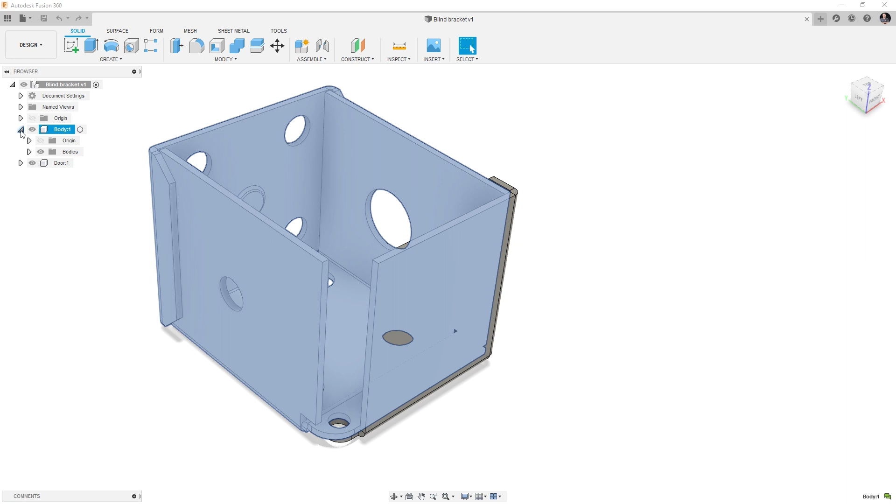This is actually an imported model, and you can see that for a couple of reasons. First, this is an imported STEP file. You will see there are two bodies here, and if we look at this first body, there are no sketches or anything in here, so it's what we call a dumb solid.

You will also see that I don't have my history turned on in here. Whenever you bring in a STEP file or another type of file into Fusion, it ends up in what we call direct editing mode.

But what's new in Fusion with sheet metal is that you can convert these dumb solids, a STEP file or a SolidWorks file or an Inventor file, into an actual sheet metal part right inside of Fusion. So if we go over to the sheet metal tab, there's an icon that says convert to sheet metal.

If I click on that, it will tell me that it's going to turn the history tree on so we can enable design history. You'll see that's now activated down at the bottom. Then all I have to do is select one of the faces of one of these bodies, so I'm selecting the side that belongs to this body.

Then it will call up your sheet metal rule set for whatever you had. If you're not familiar with sheet metal in Fusion, you can totally customize these sheet metal rule sets. I'm just going to pick the default I have in here, and you'll see that it's detected this is 1 millimeter thick, so it's a tiny little bracket. I'm going to hit OK to that.

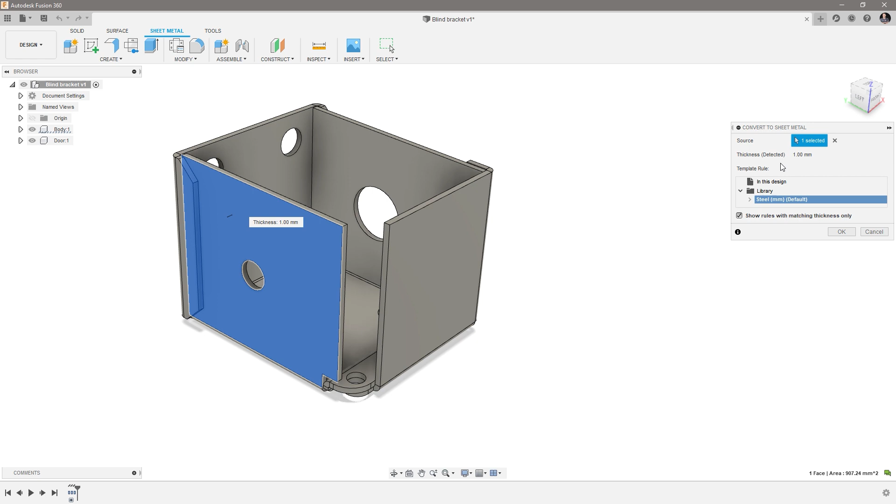When I do that, you'll see it converts it from a body into a sheet metal part. If I just expand it here, you'll now see that it has the rule in here and a sheet metal body.

We can do the same thing with the door piece here. The icons have changed a little bit because now it's a sheet metal part, it's ready to go, but the convert option is still sitting right here under create. Click on that, click on the door part, use the same template, and hit OK. Now we have two sheet metal parts.

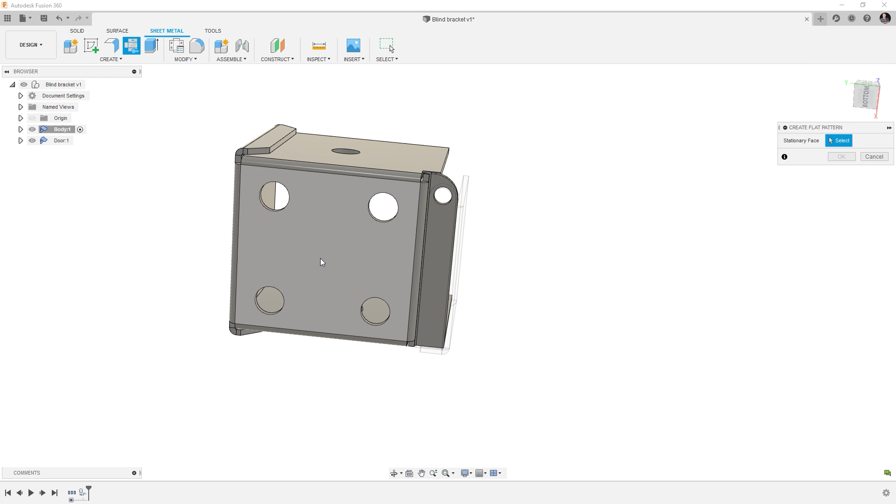That means we can just activate whichever one we want, and then go ahead and create a flat pattern from it. When you do that, you have to select the stationary face, select this bottom part of the bracket, hit OK, and then you'll see it becomes a flat pattern. You can now use that for cutting out with a water jet or a laser or whatever you want. We can do the same thing with the door.

We can go down and activate the door. And we can go over and say we want to do a flat pattern. Maybe we select that back face there, hit OK, and that will then become that flat pattern there.

Now, as you maybe have already noticed, we actually kind of have a sheet metal assembly. So just in case you didn't know, if you are already working with sheet metals, this is probably not new to you.

But we can actually use our standard assembly tools inside of something like this. So I can right-click on the main body, and I can ground it. So now that is kind of grounded and stuck in space.

And then one of my favorite assembly tools is the as-built joint, because this door is sitting where I kind of want it, I can just go ahead and click the two components, and then I can place, I have a revolute here, I can place that wherever I think I want it. Let me just zoom in, let's click it right there, and then we have a revolute joint placed, and now this is working as an assembly.

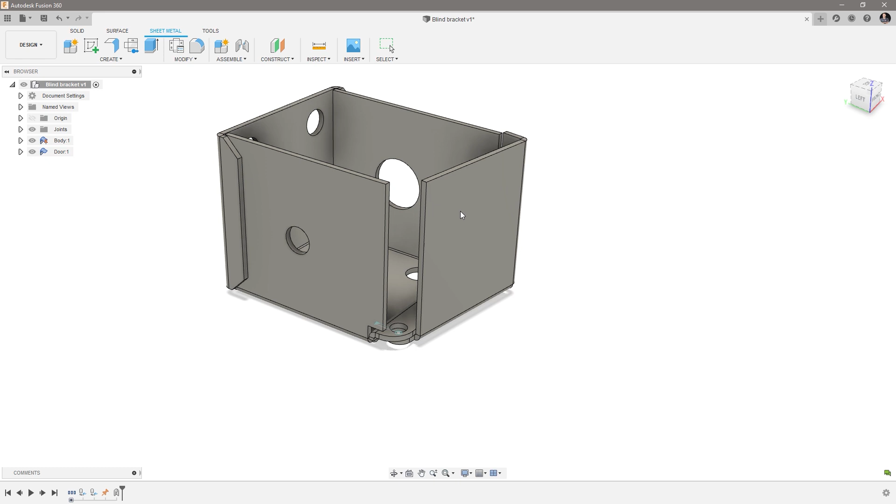So that is one of the new things inside of Fusion here, converting dumb solids or imported models into sheet metal.

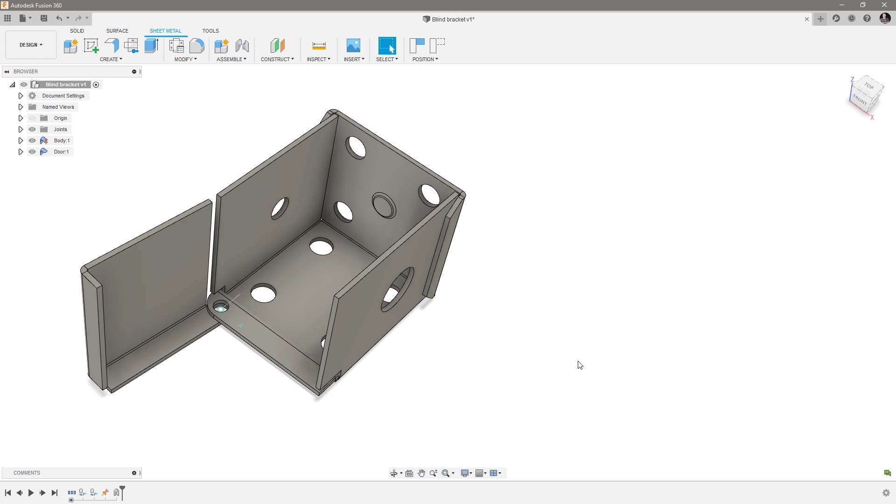Now this part here, to show you the next what's new, I thought that it would be a good exercise and some best practices, because I have a tendency to make these a little long, to go ahead and actually let's do this part from scratch in sheet metal inside of Fusion, and then we can kind of talk and do some tips and tricks in here.

I want to show you something about how we can do some of the different bends. You will see there's like a little dimple in here. I'll show you how I cheat to get those in there. Some tips and tricks with the holes.

So let's do that. I'm going to go ahead here and open up. Let's leave this one for reference. I'm going to open up a new document in here. And again, we're in the design workspace, and we can go over to the sheet metal tool over here.

And because we know that this is now going to be an assembly, we know there's going to be multiple components in there, we can do this, what many people know as rule 1 in the forum, as we're doing with assemblies. Before we do anything, we kind of create the components that we want within the assemblies. It's just a good practice.

So I'm going to go ahead and say new component, and it's going to give us something here. We can call this, I called it before, could call it the body, but let's call it the bracket instead, just so we distinguish the two.

I'm using my steel rules. I set the thickness to 1 millimeter, and I also have a bend radius here of 0.25 millimeters that I've adjusted in there, just in case you want to go in and work with your own. So I'm going to hit OK to that, and that's going to give me bracket number 1.

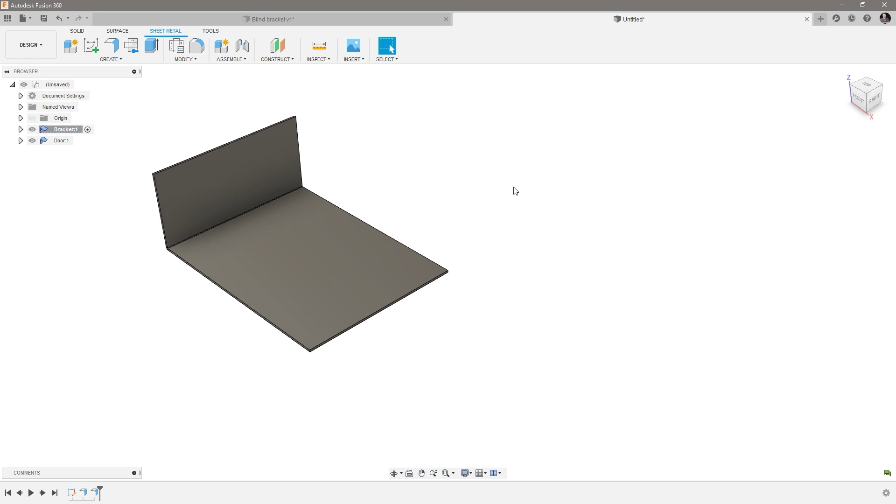But what I want to show you is, don't forget that inside of Fusion sheet metal, let me just delete all these again.

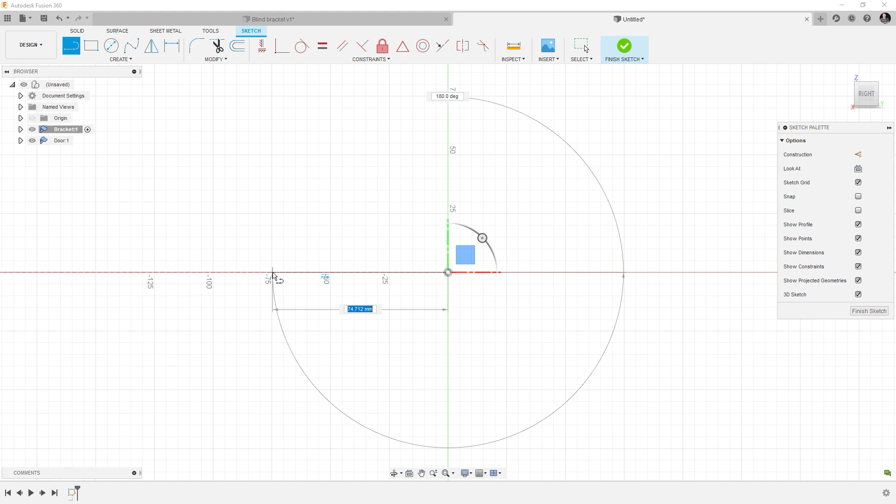Sketches is actually more powerful. So I can go in here, create a sketch. I'm going to do it on the side view here, and I'll create a line. I'm going to go over, up a little bit, and over like this, so I've created a line like this. Then you can go in and hit D for dimension.

Let's fully define this one. I'm going to make this one 30, this one 2 millimeters, and this one, I don't know, 6 maybe, like that. So we have a little line segment going like this.

Sometimes I like to do a line going over there, up and over.

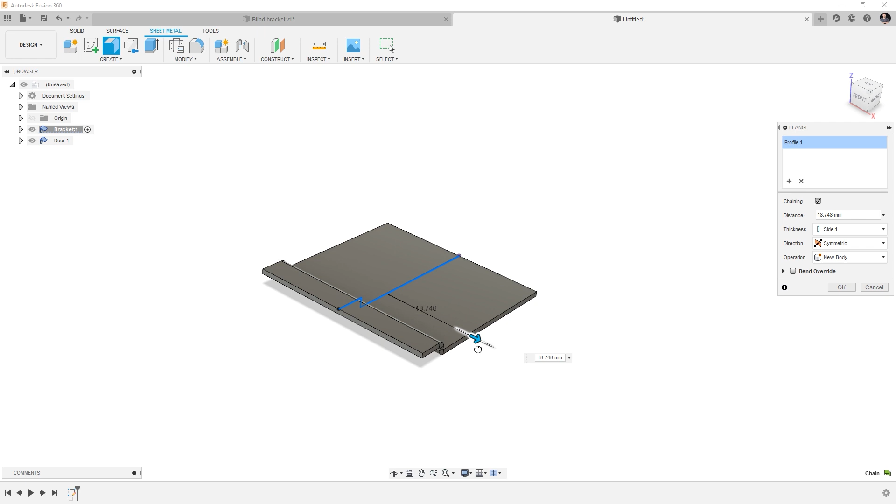What I want to show you is that when you're working in here, the flange tool will work with these. So I can actually start on the flange tool right here. I'm going to go symmetrical, and I can get my first bends in. I'm going to go 15.

That's an interesting way to think about this. Instead of doing the square and then a flange up and a flange over, you can start out by maybe just getting something like this into place.

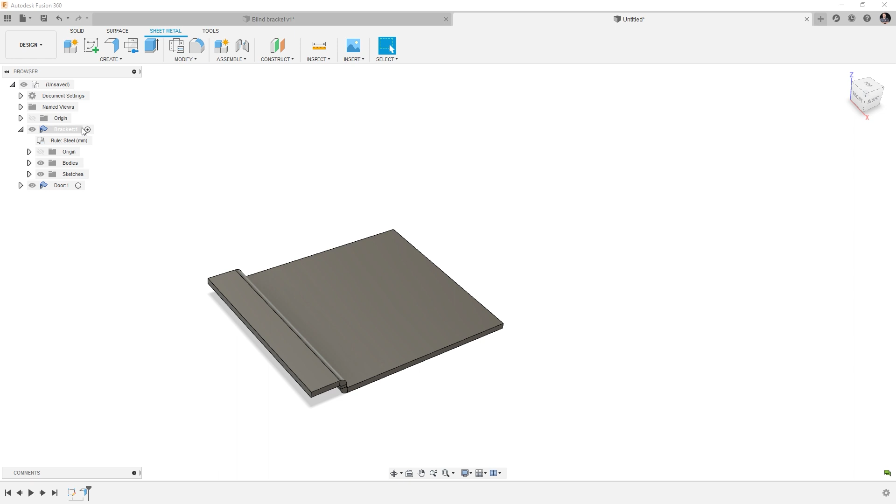At any time in the process, if I expand out the bracket here, you'll see that we have one sketch and one sheet metal body in here, nothing too fancy. But at any time, you can create a flat pattern from that and see it flat with the bend lines on there. Get out of that, and you have that flat pattern in there to work with.

Let's go ahead and start creating our part here. I'm going to go up 30 millimeters, out here too, actually going over to the outside of this, like this. And then one trick I want to show you that is new.

You will see you get a warning with the flat pattern because I added a new flange, but you can always right click and update the flat pattern, and it has taken that into calculation. So if I right click and activate, you'll see we now got our second section over here.

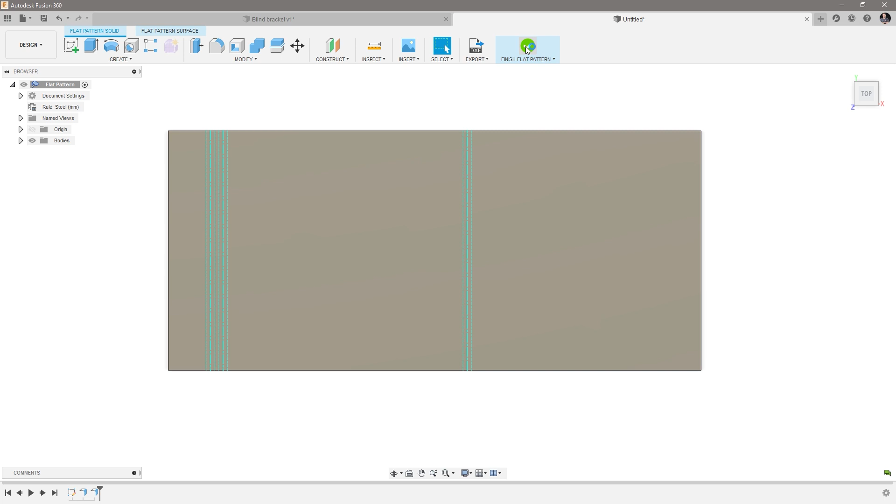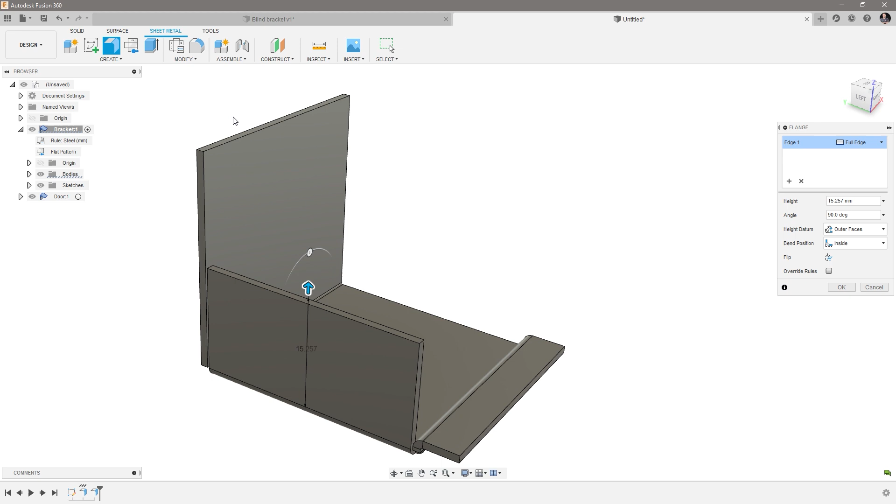I maybe get a little too basic, but what's new in Fusion is that if I activate a flange and select this one here, on the inside, I can start making the side. You can actually select multiple sides within one operation if they go to the same height.

So I select the first one, then go over here and hit add two, and select that other side, and just like that, I can add two sides that does the same thing within one command. I'll show you that, so I got that there.

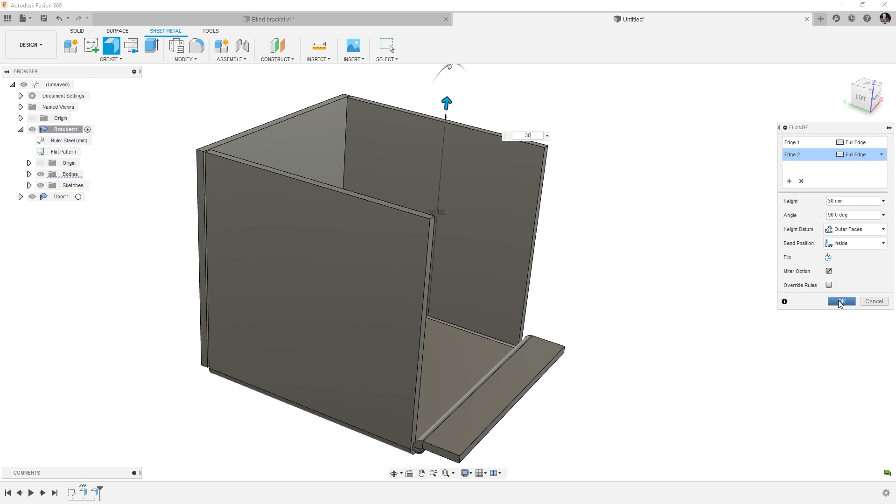We could, for example, there's like a wraparound on this side here. So I'll hit the flange again, select this side, select this side—two edges—and go to adjacent here, and you'll see that I can create two sides at once.

What's super helpful about this is that we're working with fewer operations, right? We get less of these flanges down here, which can be helpful. That's the second new thing, and that's actually all I have.

So converting a solid into a sheet metal, and then you can now multi-select in there. I don't think I'm forgetting anything else.

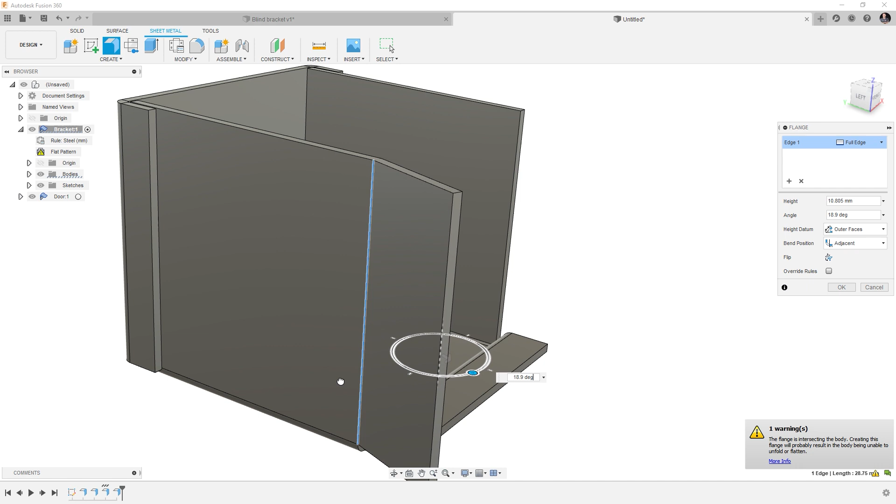All right, let's keep working on this one because I think I'm going to show you some things you'll hopefully enjoy. Another trick with this flange tool is that if I select this edge here and pull an edge out, you can grab this little handle and move it over. Now when I move it over, you'll see it interferes with our already existing flange, and you get a warning about it down here. It's not an error, it's a warning.

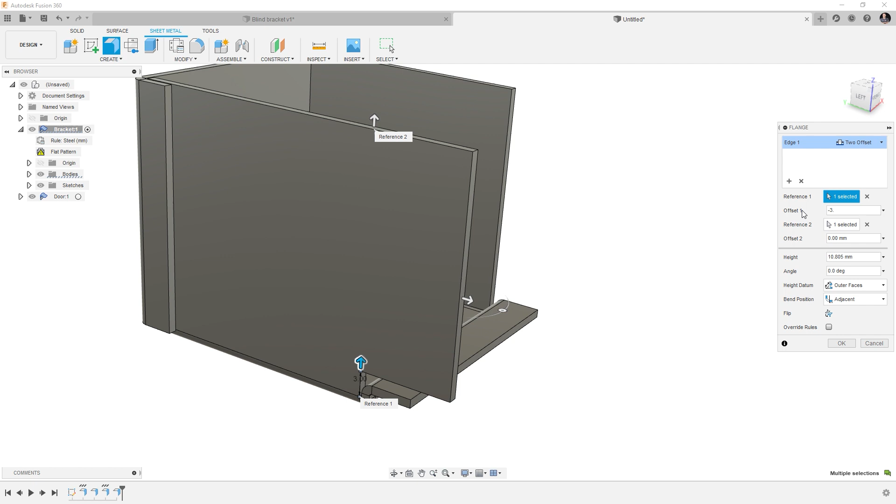In the flange command, you see it says full edge. If I hit the drop down, I can say 2 offsets, and that will give me an arrow here and an arrow here. Now I can actually just drag an edge up like this, and add in -3 millimeters maybe, and I have now moved that edge up, so I don't have an error anymore.

I'm going to go in and edit that feature and grab this edge because I want to control the depth of this. One of the things that's nice when working in sheet metal is I can control it - if this is active, if I pull it, you see it's blue, and if I select this little snap point here, you'll see that it connects to that edge. So that's super helpful.

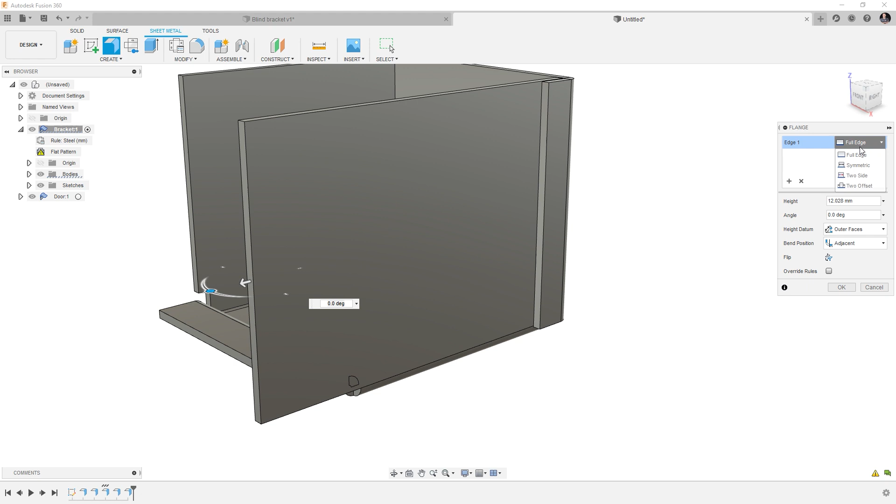I'll show you that little trick again because I want the same thing on the other side, just a little different. I'm going to do another flange here, pull this out, drag it out, rotate it. Now we're going to get our warning that we are actually colliding with our part. I'm going to switch this to a 2 offset.

I'm going to do the same thing I did before, move this one up about -3, like that, so it's the same height. But what I want to change is, instead of doing that to that intersection point right there, I can also just select on that face right there. Hit OK, and then we kind of got that laid out right there.

Now at any point, again, like I said earlier, you have this flat pattern here. You can right click, activate that, and go ahead and see what you have created in here. So you can go back and forth.

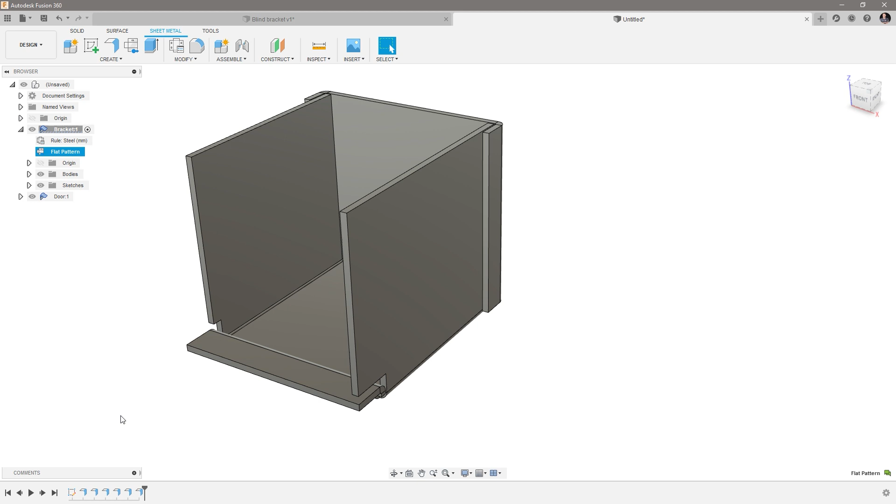All right, so we're still working just on the bracket here. Many times when I'm talking about modeling, standardly I'm talking about adding your fillets and your chamfers at the end. That's kind of probably also somewhat the best practice when you're working in here. So we're just going to leave that for right now.

But one thing I wanted to show you is how we can work with - we kind of got the base shape together here. One of the things we need to do is punch some holes in this.

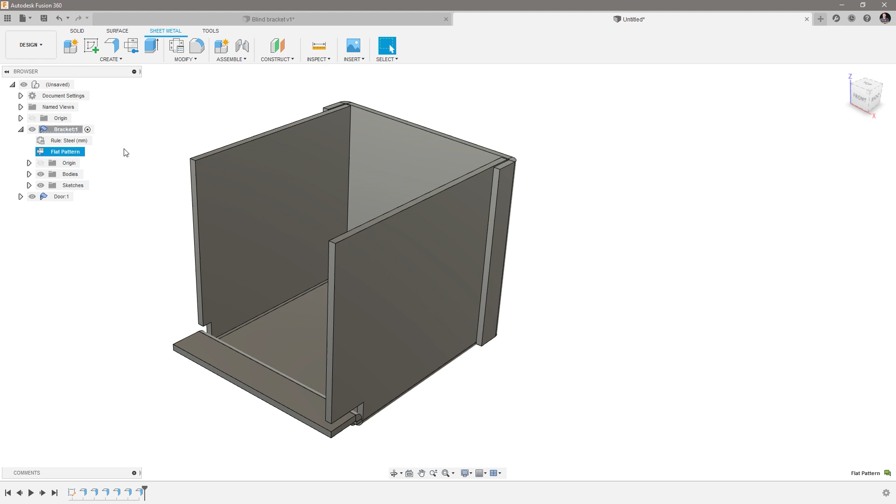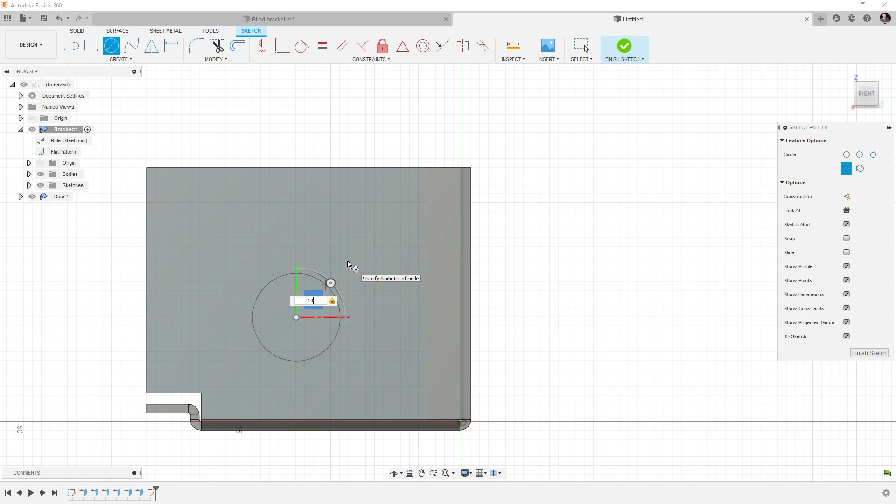As this is folded here, you can actually go ahead and just open a sketch on a face like here, and it acts the same way as if it was a standard body you're working with. So if I go ahead here and make a hole that is 10 millimeters in diameter, I can do a dimension and place it.

Let's do this 15 and let's do from here to - I like the edge, so this edge - and do that 15 also, so it's kind of in the center. So that's a standard kind of sketch, and you will see that that gets placed down here.

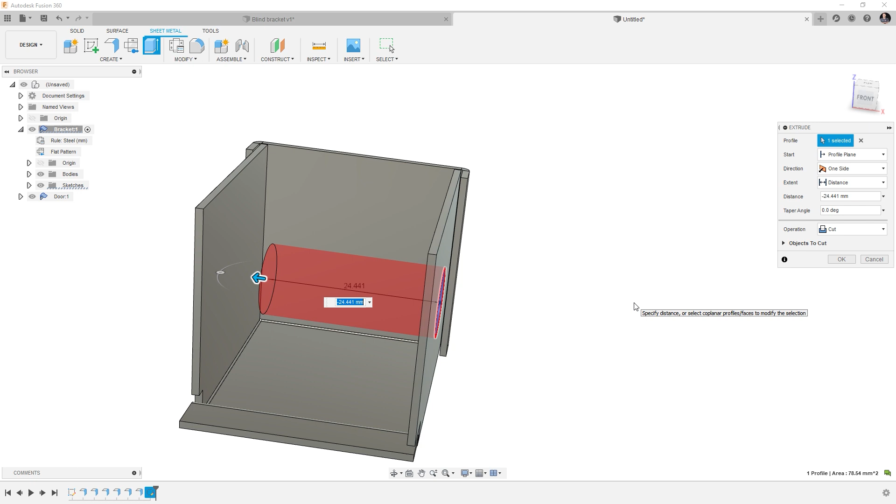We can go ahead now and do an extrude, or press pull, same thing. Drag it through here. Now, I will normally, when working with something like this, not just drag it like this and leave it. It's just, if you're changing things - let's say we made this narrower - suddenly we'd have that 10 millimeter hole going all the way through.

So one way you can do it, you could just click on this back face here, and then it will use that measurement right there. So we get a cut there. That's one way we can do it.

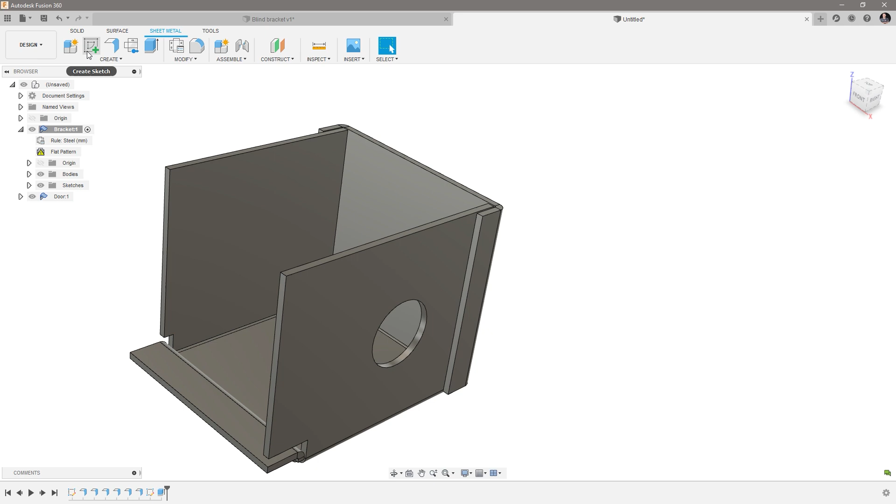The whole thing is folded up, and actually I have a smaller hole over here on this side. So what I'm going to do is open a sketch over on this face, and then I can use the center of this hole.

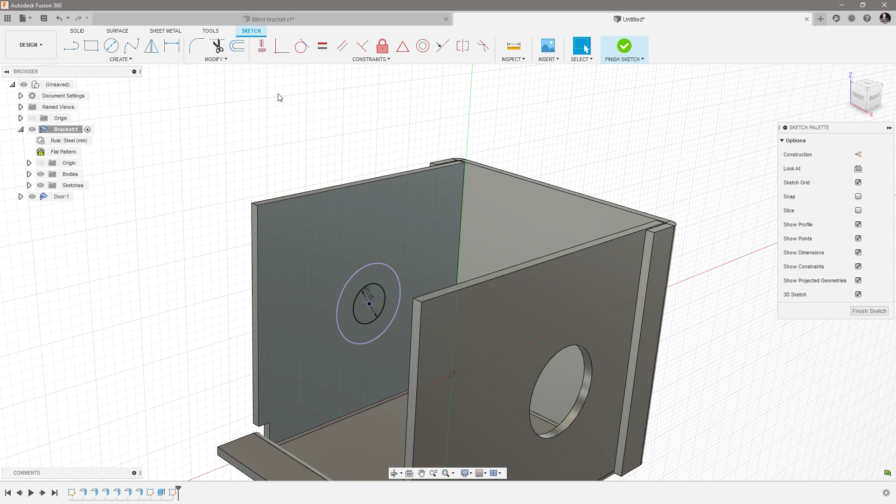So if I do P for project, just like you've seen me do in the modeling environment, we can do that. Hit C for circle. Now we're using that center point of the 15 and making sure that this 5 millimeter hole sits over here, and we can now go ahead and use cut through that, right? That way, and click there.

Now I know that if I ever need to change the hole location for this hole, all I have to do is go over, right click, hit edit sketch, and if I change this dimension to 10, like this, our other hole will follow along. So you kind of have these different options in here.

Another option we have when working in here is we can actually do these in a flat state, because when you're working in the tool and die, punching these holes, you're doing everything when it's flat, not when it's all folded up like this.

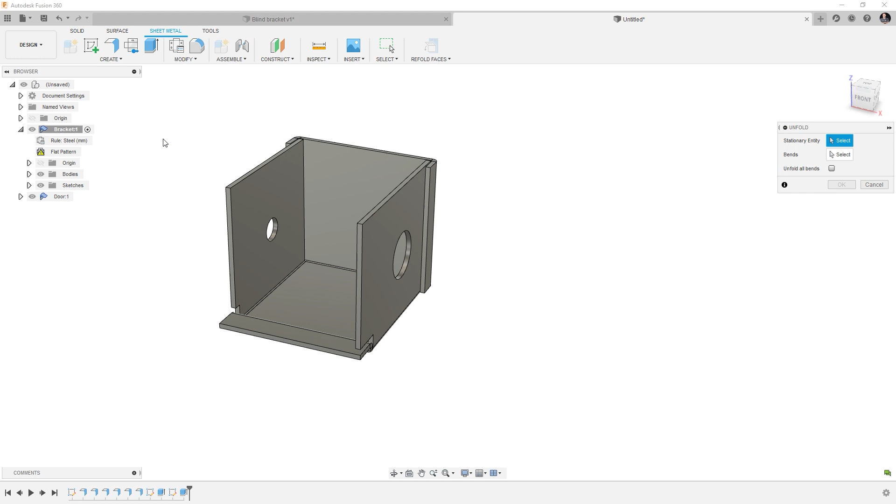There is a function under modify called unfold. You click on that, and it asks for a stationary entity, kind of like when we did the flat patterns. I'm going to select the bottom, and there you can select your bends. You can just hit unfold all bends, if you're lazy like I am, and hit OK. Now you've created a flat pattern.

But it's a flat pattern that lives in history, which you'll see in just a second. It kind of lives within your history tree out here. You can go back and forth.

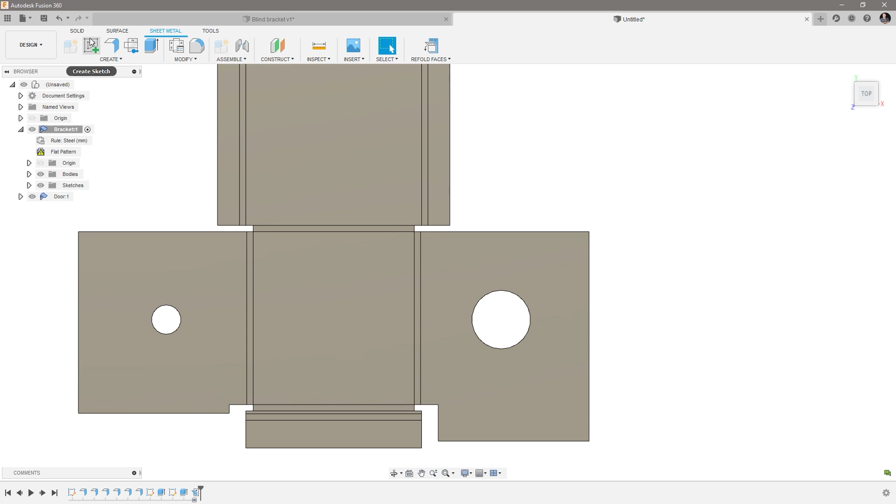So there's a couple different ways I want to show you how we could place some holes. One way could be to start a new sketch on this face, or this face, doesn't really matter. Select on this face, and hit O for offset. If I select here, I can drag in, like in the center, -6, and use this to place some holes.

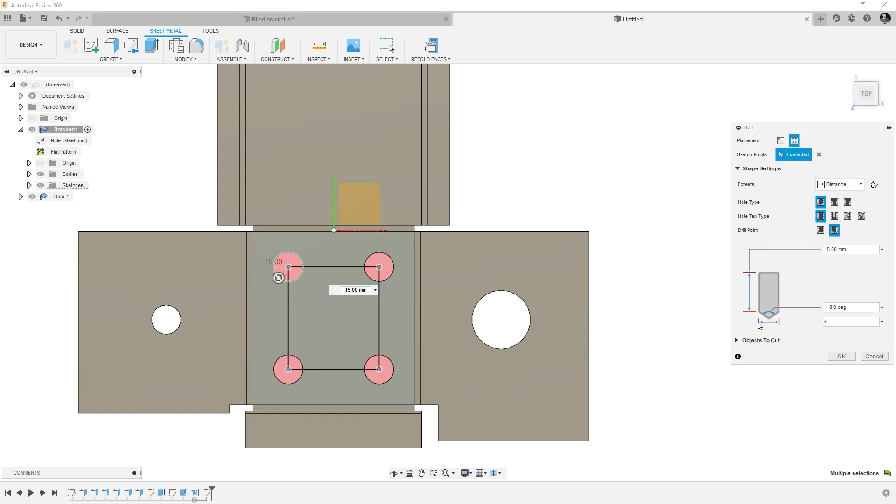The way you could do that quickly would be, if I exit out of the sketch, to go find the hole command, because that also lives within the sheet metal tools. You can select the holes, select placement, select multiple from a sketch. If you have a sketch, you could just click on these 4 things. We say we want 5 millimeter holes, go all the way through, hit OK, and we've placed these holes.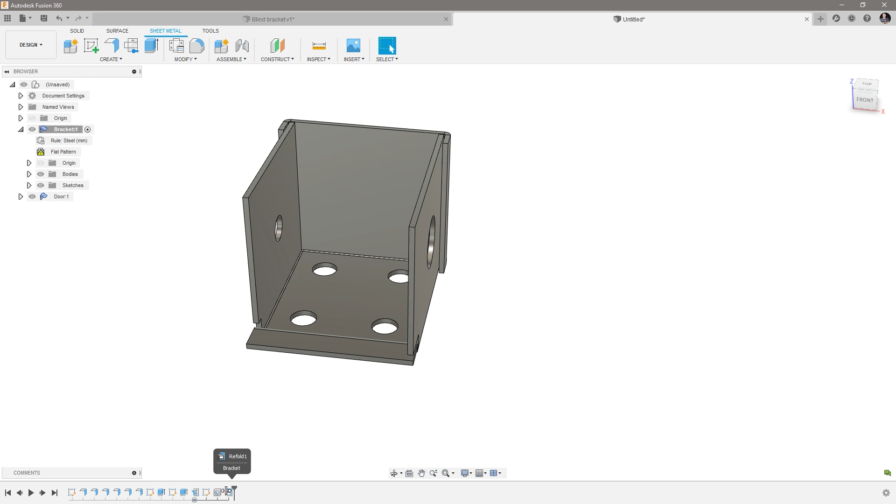What's kind of cool is that this works. If I go ahead now and say let's refold the part, you'll see the part is folded up with these holes. Now we actually have an unfold and a fold over here, and this works down in the timeline. So if I go one back, it's flat again.

But I wanted to show you another way you can do this, because there's many different ways to place holes. So if I go ahead here, I just deleted the sketch and the hole command. If I open another sketch on that same face, you could draw a line and make that a construction line. You do that by selecting the line and hitting X, so now that's construction.

I would still maybe, if I'm placing 4 holes, just sketch up a rectangle also. You could now use my favorite command, the symmetry command, which is 1 point, 2 point line. So now these are symmetric. If I drag one corner, see how it's symmetric over our line here.

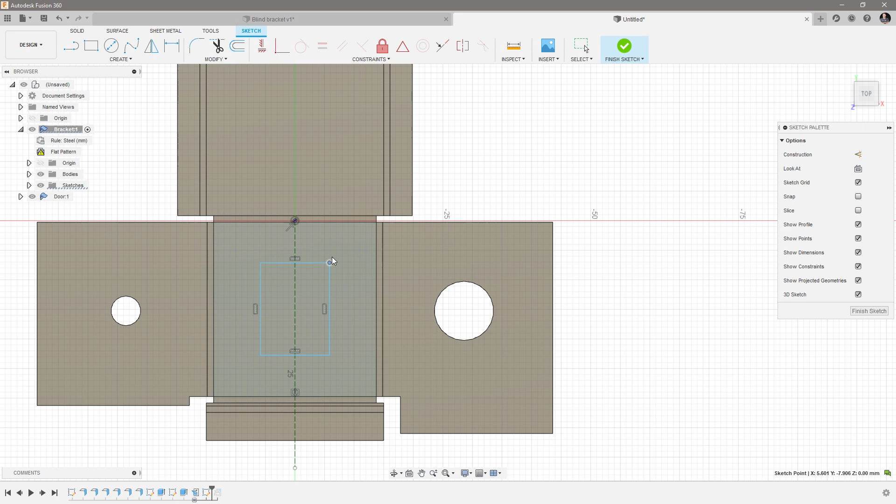Now we could hit D for dimension and place some dimensions. I'm going to select the edge of our fold here, and maybe make that 6. Then I could place a dimension from here. Let's make this 15, and this 15 as well. So I'm sketching the same thing as we did before, right?

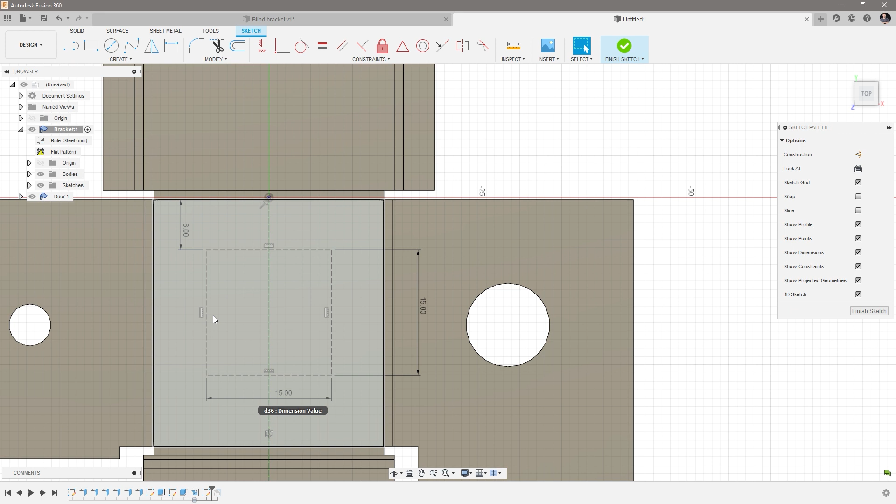If you want to select that whole rectangle, here's a neat little trick: if you double click on a line, it'll select the whole thing. Hit X to make it construction - these are handy shortcuts. Then I could hit C for circle, and I'm just going to draw these circles up here. Again, just showing you a couple different ways you can do this.

Then D for dimension - so I've just placed 4 circles, a bit wacky since I didn't try to get them accurate. Let's make this one 5 millimeters. You can see that it's black, so it's fully defined. Then we can use the equal command and go around here and make all these equal to one another like that. And that is fully defined.

And then we could now go in and create our extrude and cut these holes out. That's one way we could do this. I finished up that sketch.

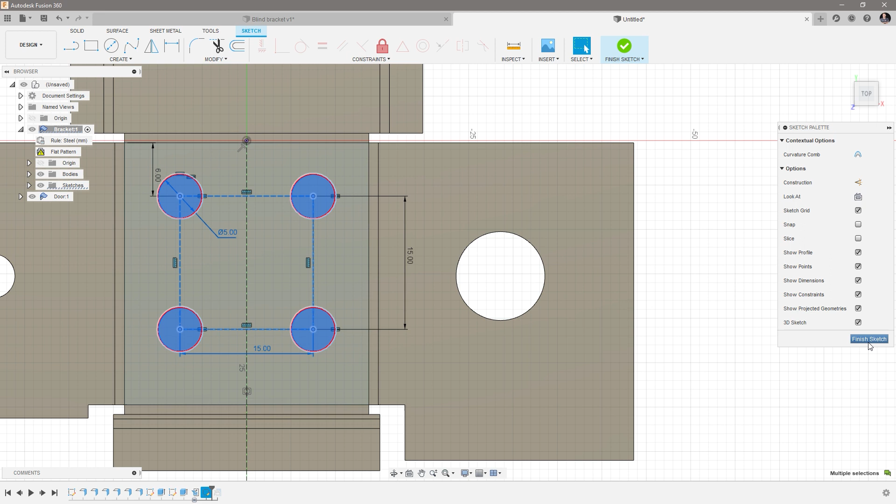But the reason I wanted to show you this is if I go back into the sketch here, edit sketch, you could actually drag a window around here and select all our geometry. Then we could do a Control C, which is copy, finish that sketch. We could open a new sketch on this face and do a Control V. Again, that's kind of like Windows commands. That will open up the move copy, and we can now move these holes up here. Now we have these holes up here.

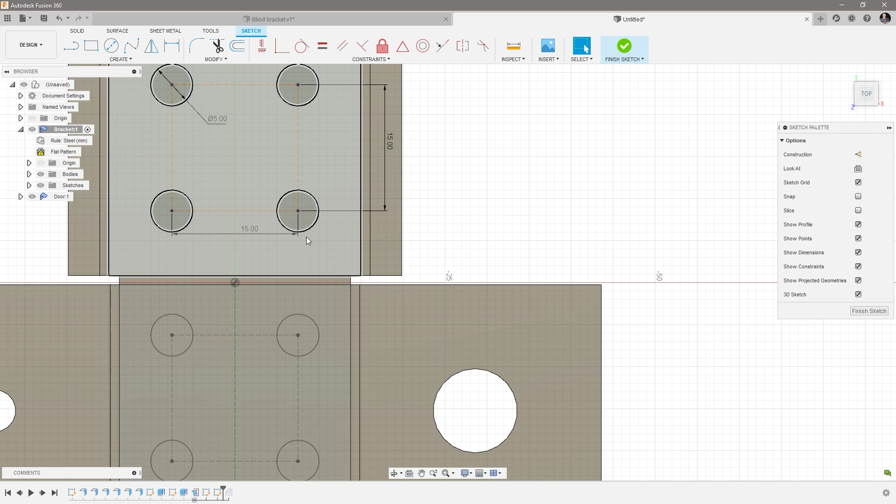Now you can see that they're not fully defined. They're not all black because they are now moving around like this. So we could go ahead and create a line from our origin again, just to have a construction line here. Hit X to make it a construction line. Use the symmetry command from here to here to here. That will make that concentric. And then I think it was 6 millimeters on the first one, from the edge to this edge. Make that 6. And then I've copied one or the other within this.

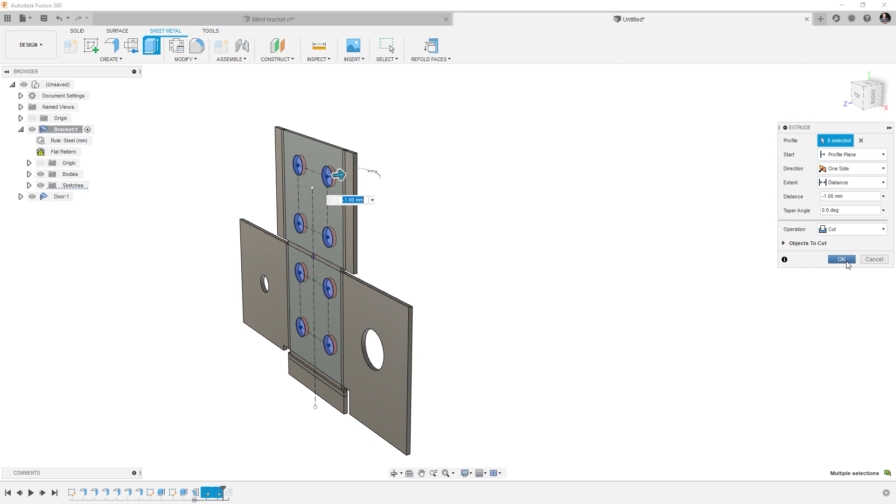So what is really left at this point is maybe going into extrude, we can select all our holes like this and cut them through to the back side here, and then we placed these holes here. Now if I move to after the fold, you will see that we got these in here. So a couple of different ways to achieve the same thing if you wanted to use the hole tool, or if you want to work it up with the sketches. I wanted to show you how you can Control-C, Control-V sketches in case you had not tried that. That is one of those interesting functions.

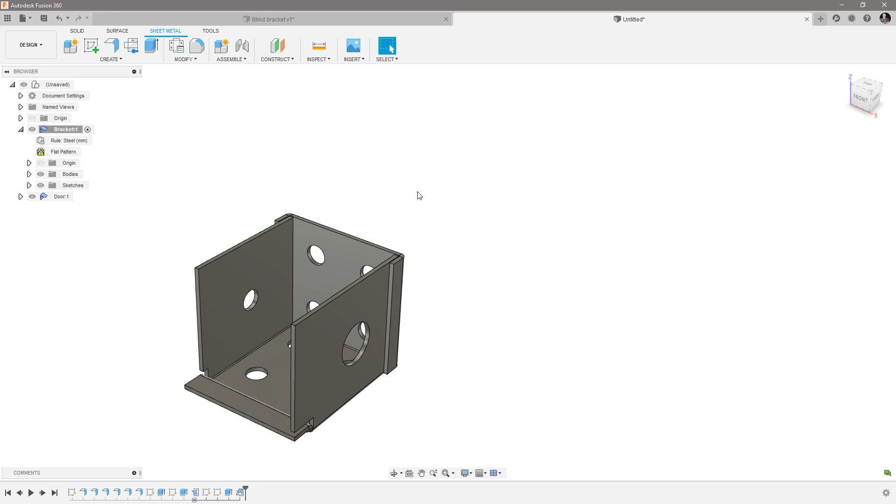All right, the next trick I want to show you, I'm going to wrap this up. The next thing I want to show you here is I put in kind of a dimple on the back, and here we are going to jump back into the solid workspace where you normally are working, instead of the sheet metal. But I want to show you how you can go ahead and do this.

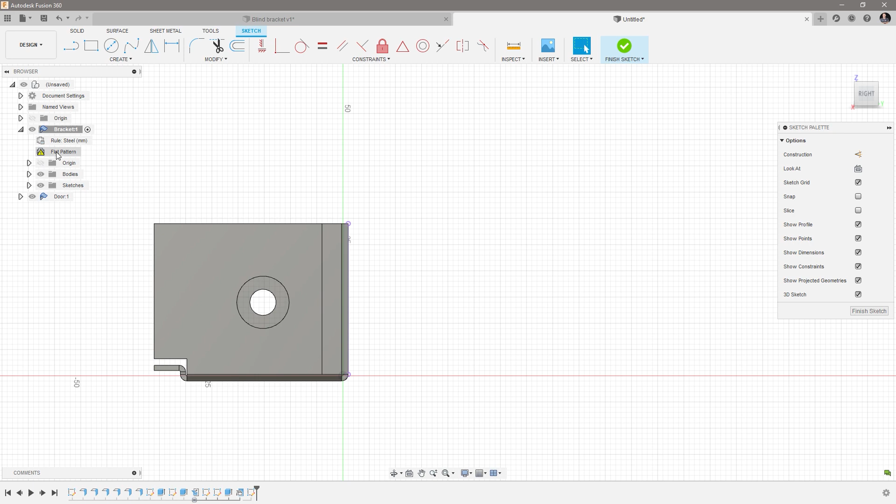So what I'm going to do is actually create a standard solid body. I'm going to go back into my solid workspace. You can jump back and forth here, you don't have to do it all in one. I'm going to open a new sketch. I'm going to select the side view because I'm going to use the revolve function for this. I'm actually going to hit P for project, and I'm just going to grab this back edge here. When I've done that, I really don't need my sheet metal bodies, so I'm just going to hide it for a second.

I'm going to create a line. I'm going to find the midpoint of my projected edge here. I'm just going to go back — this really doesn't matter — go up a little bit. And then I'm going to go back here to make sure it's horizontal. Go back here and snap it into a part here. So I kind of have this rectangle here.

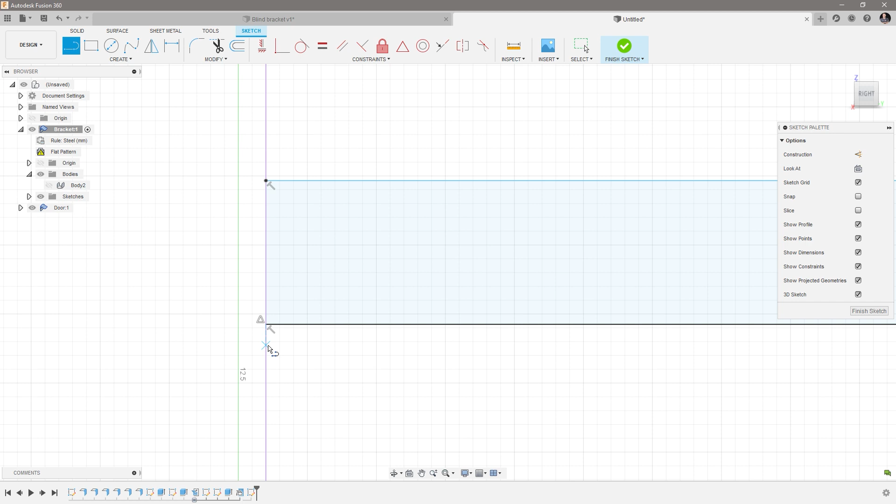Now I know that the thickness of my part here is 1 millimeter thick. So what am I going to do? I'm going to create a line in here, and I'm going to make that line 0.5 millimeter deep, I think. And then I'm going to make a line vertical up like this. Okay, so I got that.

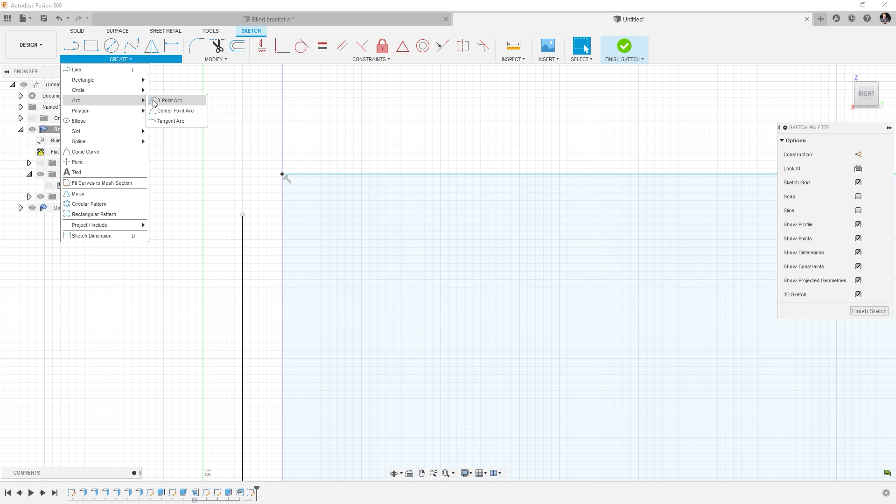And then I think I'm going to create a 3-point arc and just place an arc here like that. And then if I use the tangency tool between that arc and this projected line, then I actually get this here. And I also want this to be tangent, so I'm going to make a little helping line here. I'm going to make that construction and make a tangency between here and here. So now I've got this little thing here.

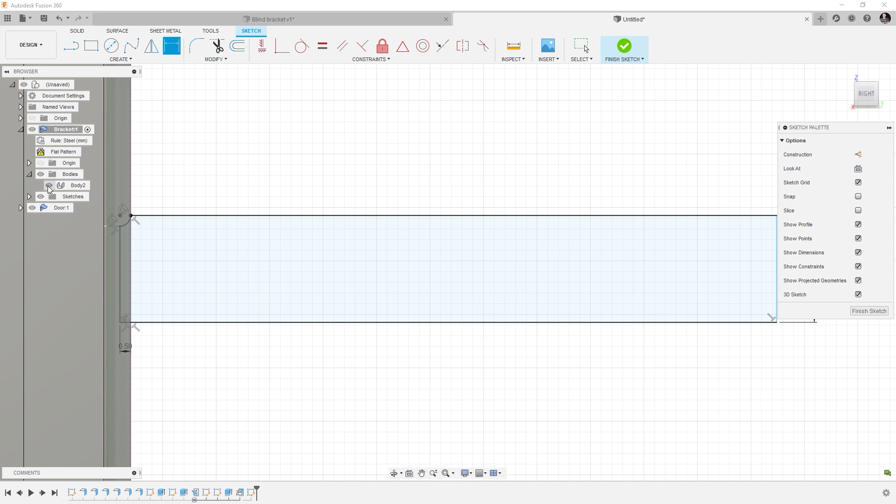Let's go ahead and add a dimension here. Let's make it 5 like this. So now it's fully defined. Notice how it's a straight line — it goes 0.5 millimeter into our sheet metal part. If I turn the sheet metal part on, we can kind of see it there, sticking halfway in there, and it goes around. It might be a little too big, but I think that will work. I'm going to hide the body again. Now if I didn't put a length in here, somebody will tell me that's a bad idea.

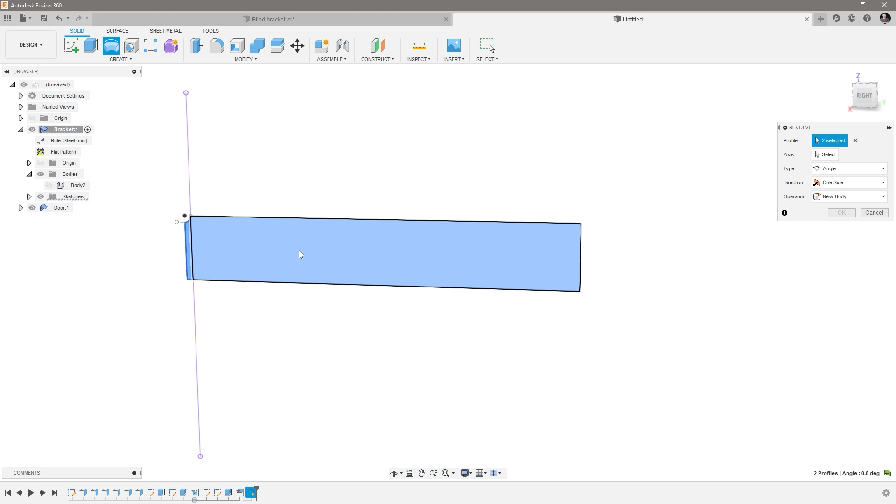Make that 30, now it's fully defined. Now I can go in and use the standard revolve feature inside of Fusion. I'm going to select my profile and the axis to revolve around, and hit OK.

Now I kind of ended up with a stamping tool. We probably also want a little bit of a fillet on here. We could add that now, I guess. I could also have done that in the sketch, but that doesn't really matter.

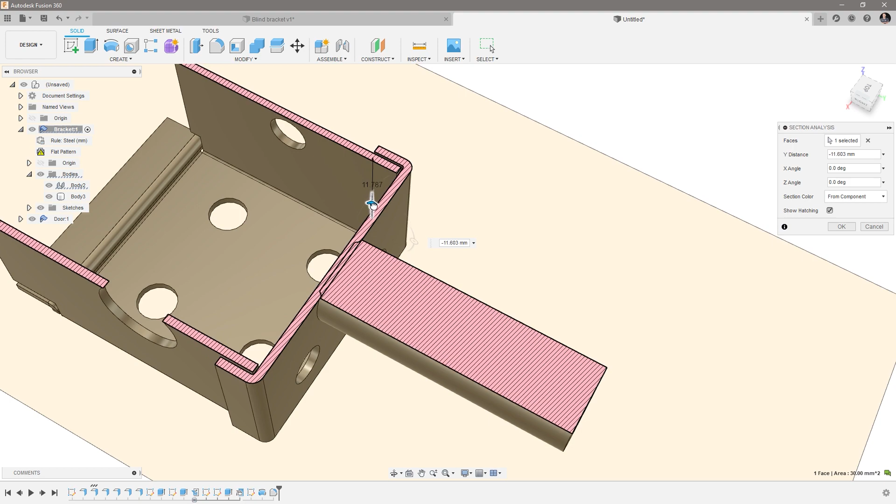Now, if I turn my solid body or my sheet metal body on again, you can see that these two are now intersecting. Let's go in and do a section analysis. Select this top face. So you can kind of see now how I have buried that inside of there. So turn off the section analysis, cancel it.

So what I can do, and this is standard in the modeling workspace, I can use this combine tool. I can say what is my target body? That is our sheet metal part. What is my tool body? That is that stamp I just created.

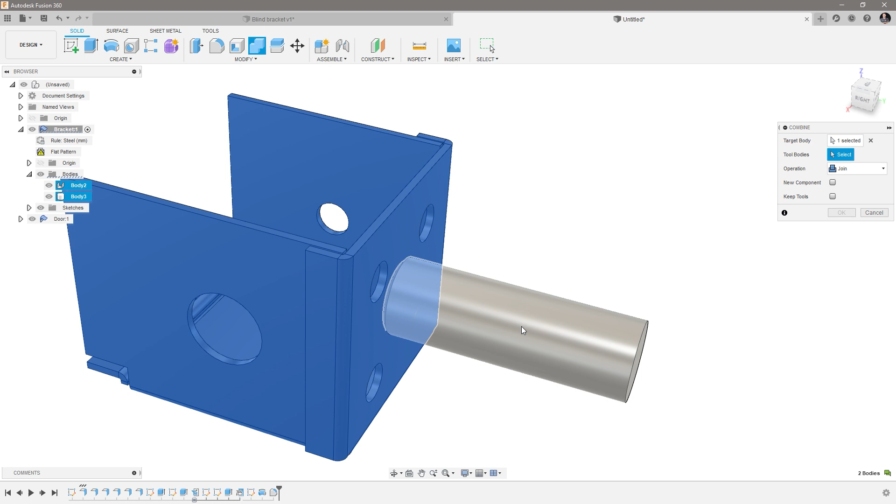And I am going to cut. But what I'm going to do is say keep this tool body, meaning this thing's not going to go away. If I don't check this, it will just be gone. But if I say keep the tool body and hit OK, it looks like nothing happened. But if I hide my body, you will see that I got the dimple impression on one side, but I didn't get it on the other side.

And this is where I'm kind of cheating a little bit here. This is a little bit of me just cheating.

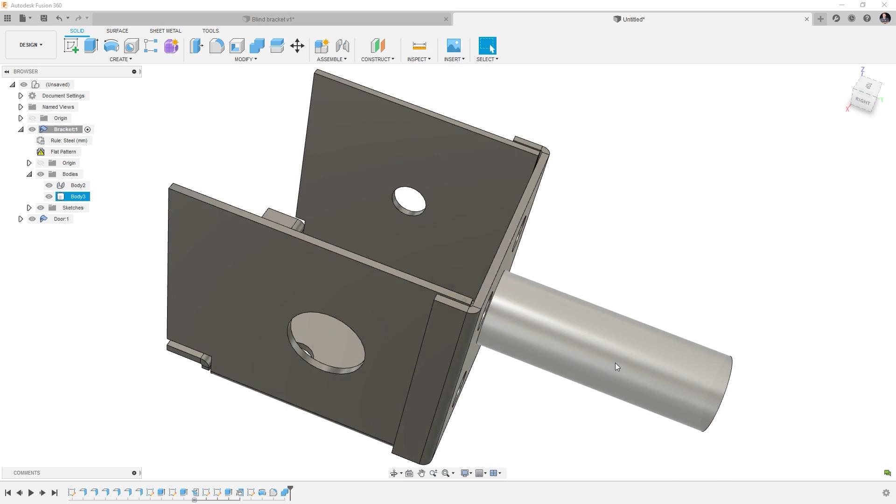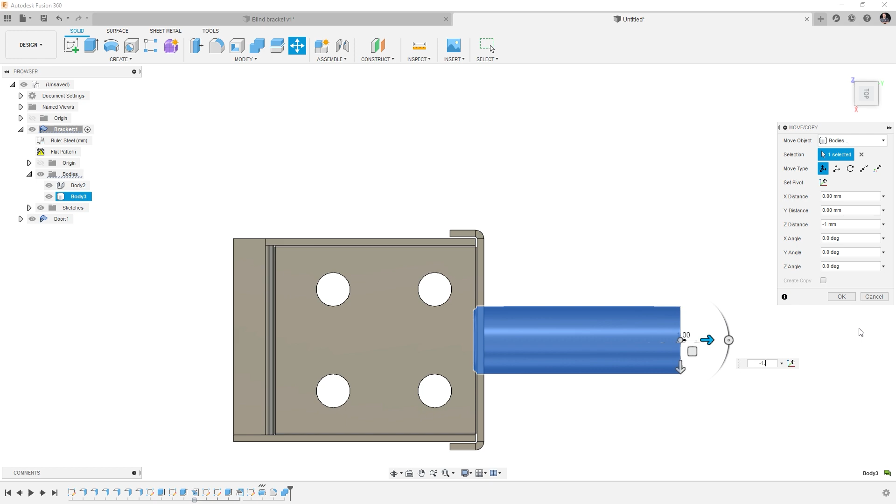So what I'm going to do is turn this body back on that we had, and actually go up to the top view. I'm going to go into the move copy tool, select that cylinder, and you see here it is. I'm going to move it in minus 1 millimeter, right there, and hit OK.

So that body still exists. Right now we still have the dimple. If I turn the body back on, I've now moved this in so it sits here. And here is where things, I think, get kind of interesting. If I hide my sheet metal part again, I can use this.

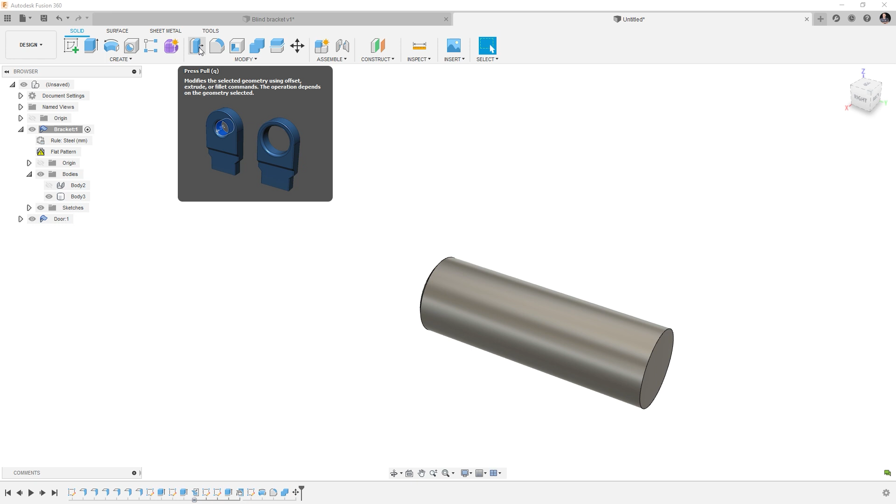Many people are asking about the difference between extrude and press pull. The neat thing about press pull is it does the same thing as extrude, but it can also do other things. You can select an edge and put a fillet on it, instead of using the fillet tool.

But what you can also do is, if I hit press pull here and just drag, I'm almost cutting away my little stamp, all the way back to my minus 30. So I'm literally removing the whole straight portion I had.

And if I turn my sheet metal body back on, now it looks like I have that dimple. And all I now have to do is use the combine tool. Instead of cutting, I'm going to join this with that body like that.

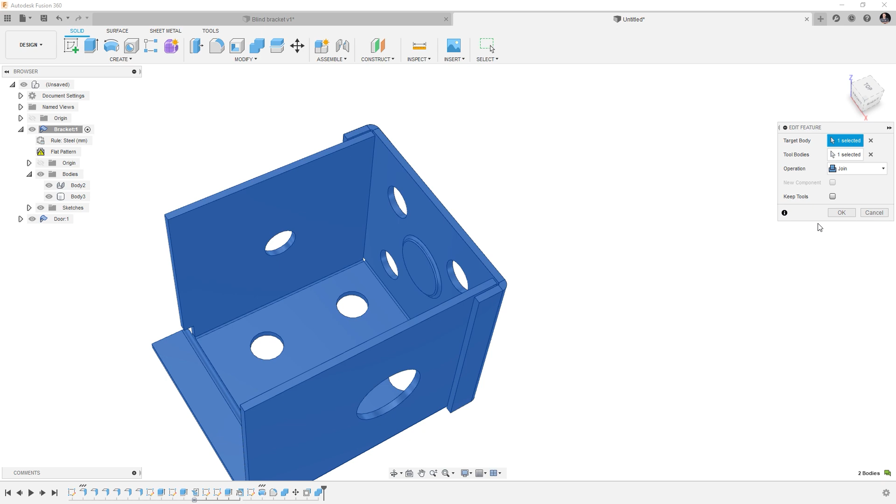And now that has... oh, I had the tool body on. Hang on, edit—turn off keep tool body, because now I don't care about that tool anymore. Hit OK, and you will see that the body goes away, and now I have created this dimple.

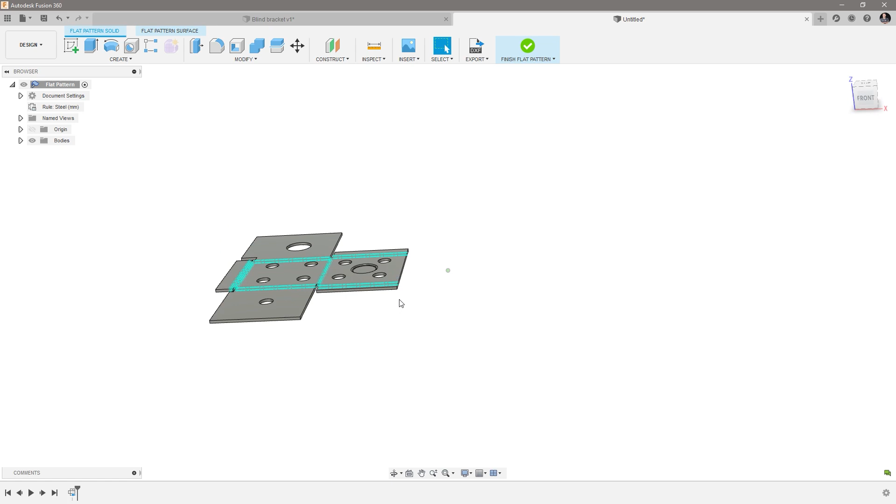And this is all captured down here in this little workflow. If I go up and activate my flat pattern, you will see that it becomes flat, and the dimple still shows as if it had existed there, like it's been put in that way. So that's the trick to show something like that.

And, I know that this is probably going to be a long video.

Another trick, just to show you—we can go in here down in our history tree. You can do this in any workspace. We can hold down Control and select multiple operations.

You can right click and create a group out of it. So what this will let me do, down in this history tree, you can do this with anything here. I can select here, I can also hit Shift and select the bottom one to select all of these, right click and say create a group, and these are now grouped together. If I right click on that group, I can rename it, and I can call this my dimple tool.

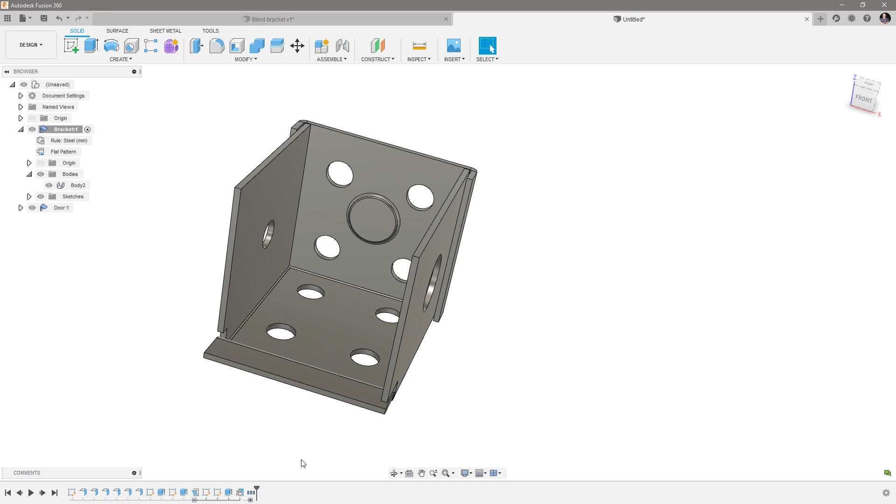Now, 6 years from now, when you're opening this part up and wondering what the heck, all the tools you used to do that dimple, which was kind of a workaround thing you maybe don't want visible, it's almost like an operation within an operation. So you're kind of hiding that in there.

You can do the same thing with the holes, if you think these holes should have been grouped together as holes. This is one of the ways you can expand them. This is kind of a way you can work with that timeline.

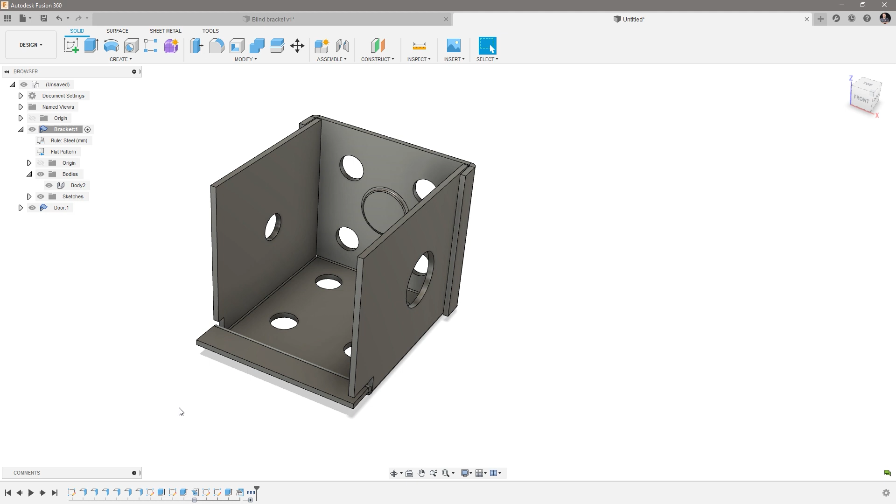I am going to add a couple of chamfers to these edges here, because now I'm just about done with this part. Let's go 3 in, like this. And that almost finishes this part.

We need to put a hole here for the hinge. But let's just flat pattern this, activate it. So you can see the flat pattern, we're still good.

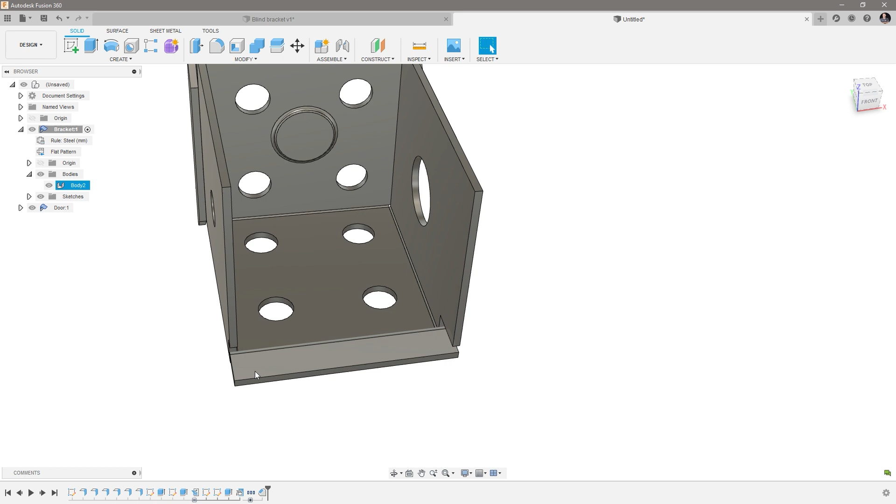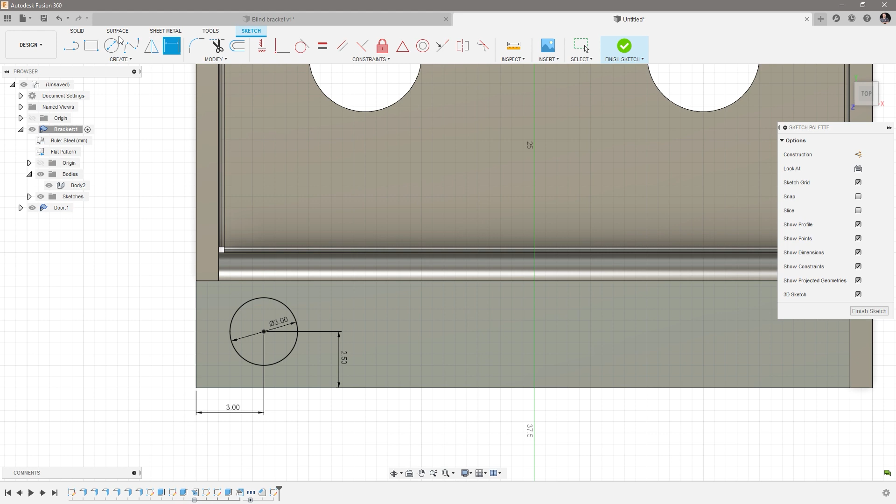Let's create that last hole here. I'm going to select the sketch on there. This is going to be a standard sketch, right? C for circle, 3 millimeters, D for dimension. Let's go ahead and do it 3 millimeters from there, and 2.5. Hit Q for press pull, and we can cut that there.

I still don't use the hole command, even though maybe I should. That's going to finish our one bracket here. So now we could right click and get this turned out to send that to the laser cutter or whatever we need.

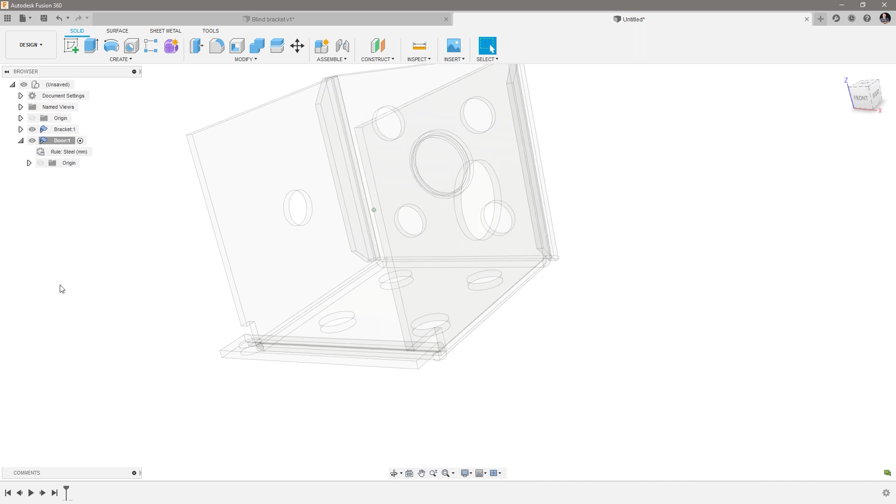So let's finish up the door. Now the door, I'm going to minimize this. The door, we just created the part, but we don't have anything in here other than the rule. So what I'm going to do is activate the door, and we can see how everything gets transparent.

I'm actually going to go ahead and create a new sketch. I'm going to use the center plane here so we have symmetry. But I think I'm going to borrow this edge, so I'm going to hit P for project. I'm going to borrow the edge from our brackets, right? So I'm borrowing that, and I'm going to hit L for line.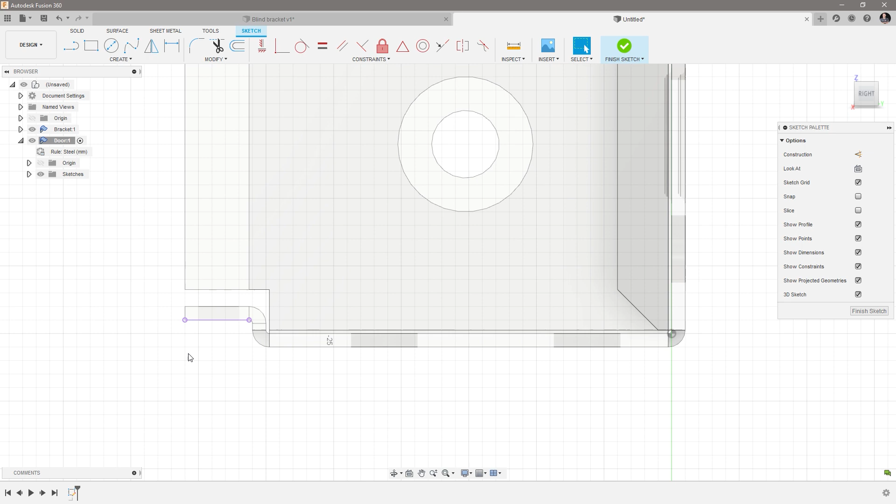I'm going to draw a line that's going to go vertically up to about here, and then I'm going to use coincident for that line to that edge of our bracket. So the door right now, as I'm working on this, is referencing the bracket, utilizing what I've already drawn up in the bracket. But I have the door activated on that little thing there.

So now I can go back to sheet metal. I can say I want to do a flange. I'm going to select that line, select that line, and now you will see that I'm getting kind of like a flange out here.

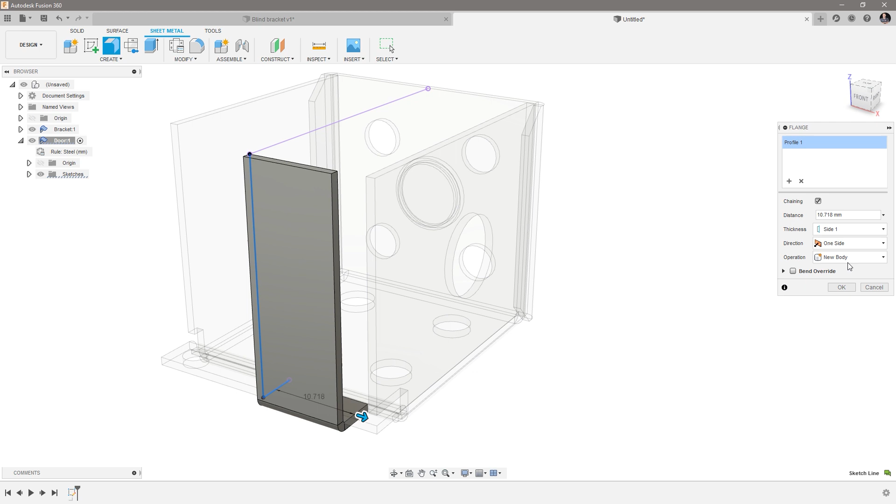Now I'm going to go in 2 directions, 2 sides. So the first side here, I'm just going to go up to that face. See, I can also select the face of our brackets, I'm using that same one. This other one, I'm actually going to stay a little shy of that edge.

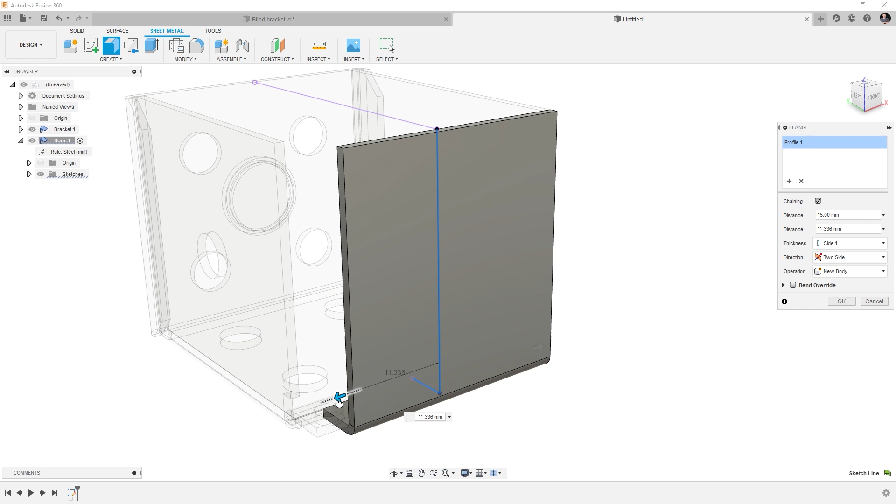So I'm only going to go 10 millimeters. I'm going to keep it 5 millimeters short. But again, this is pretty cool inside of sheet metal.

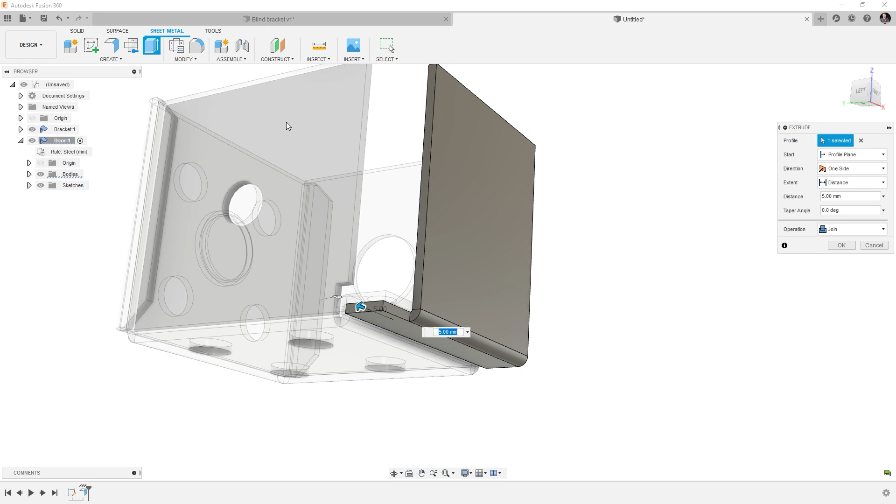I can actually go ahead here and hit the extrude, and I can just extrude this face out, and I want that to be equal to the face on the bracket there. So that gets the other 5 millimeters. And then I need to wrap around the edge, and we've kind of already seen how that works.

So we can kind of wrap that around that. So let's make that maybe 5, like that there. And this is a sheet metal part by itself. Now, we haven't flattened it yet, so we don't have a flat pattern.

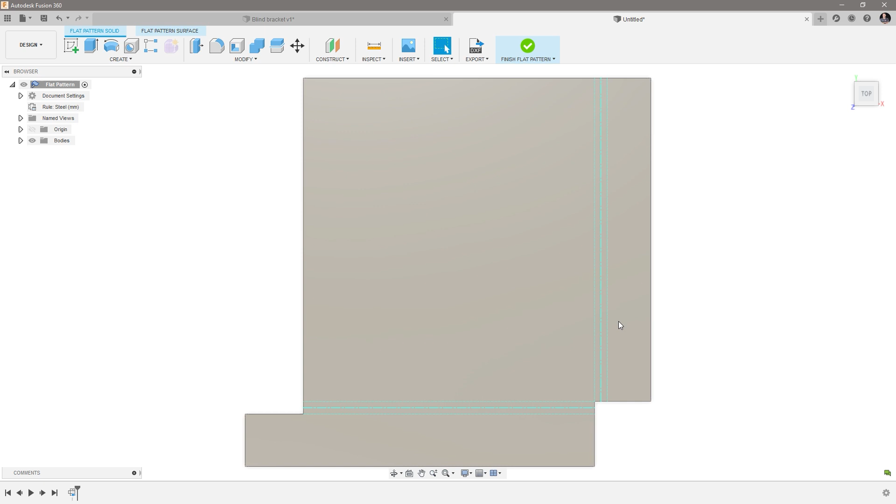You can do this at any time, but it's nice that you can click on something and make it a flat pattern. Now we get to see it and say, okay, that's something we can flatten out, and you can go back again.

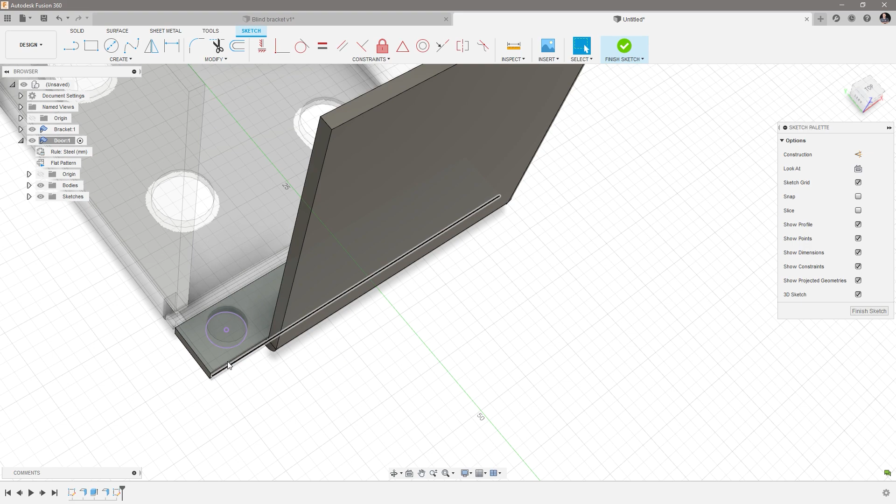I still have the sketch active, and I'm going to create a sketch on this face. Hit P for project, select this projected line, and then do a Q, standard press pull. I can pull that through there, and now I have that in.

Last thing I need to do to this part is put some fillets on it, because I think maybe I shouldn't have made it all the way to the edge. Let's put a round on here. There you go, a full round on there. But I think I'm going to hit something when I start spinning that around. Let's try it.

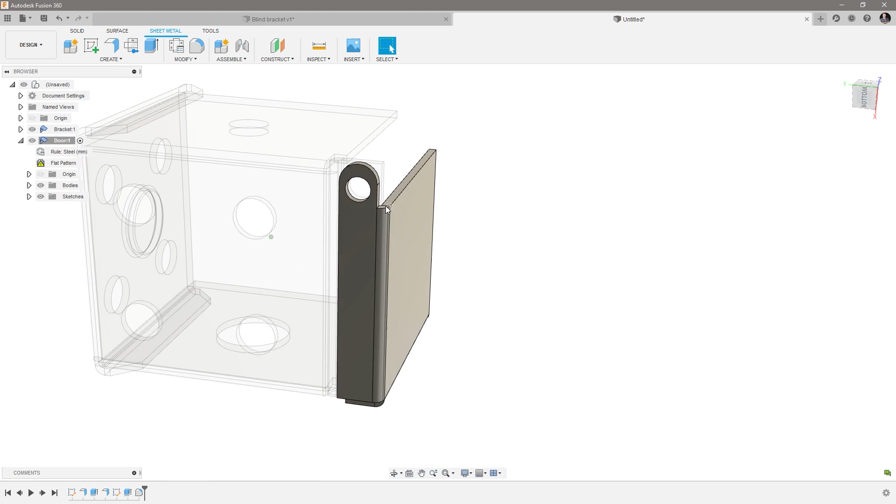So this is now done. That means if I go up and turn my assembly back on, this is now kind of the same thing as we had before. I have to adjust a couple of things.

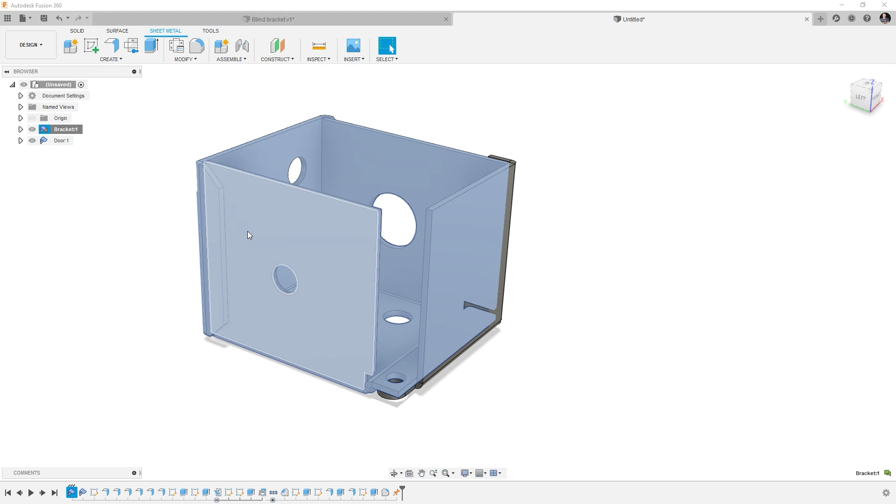So I'm going to do what I did with the imported model. I'm going to right click and ground the bracket. Now this door can move around, but the bracket cannot move around. So now I can go in and use the as-built joint.

Select these two. It still remembers I want a revolute. Place that, zoom in right there, hit OK. Let's see if we start opening this one here. There's definitely some collision right there.

That is not ideal. So let's go down and activate the door. We can go back and find out what extrusion that was. Probably that one. Edit. Nope, that was the hole.

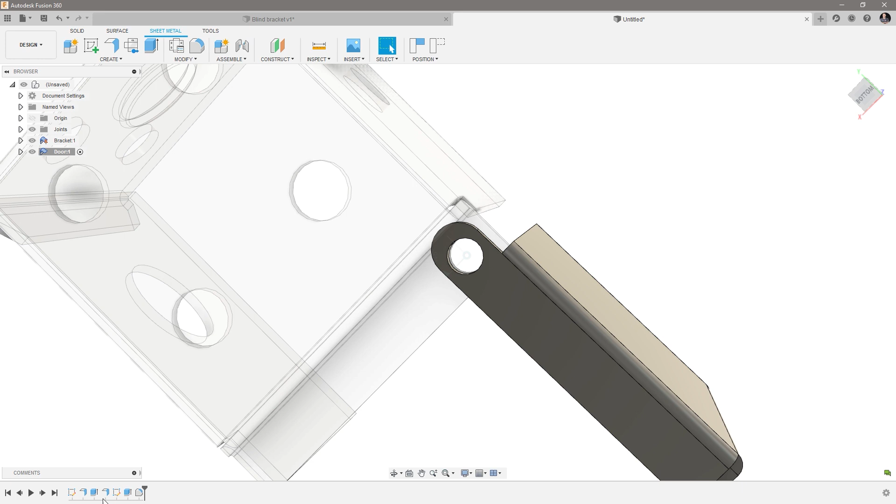Was this one? Edit. Yep, that was 5, so I'll make it 4. Get out of that.

And now that doesn't hit, but it does hit up here. So let's make the bracket active.

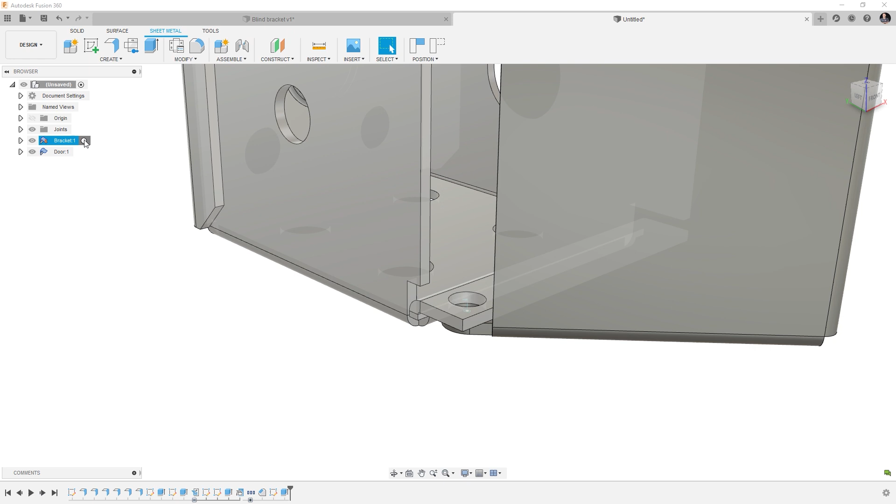And then we could add a fillet on this edge. I want to make that one 2.5 maybe, if that's enough.

And that, whoops. Did that clear it? I think it did. So now we got that, and that should close up then.

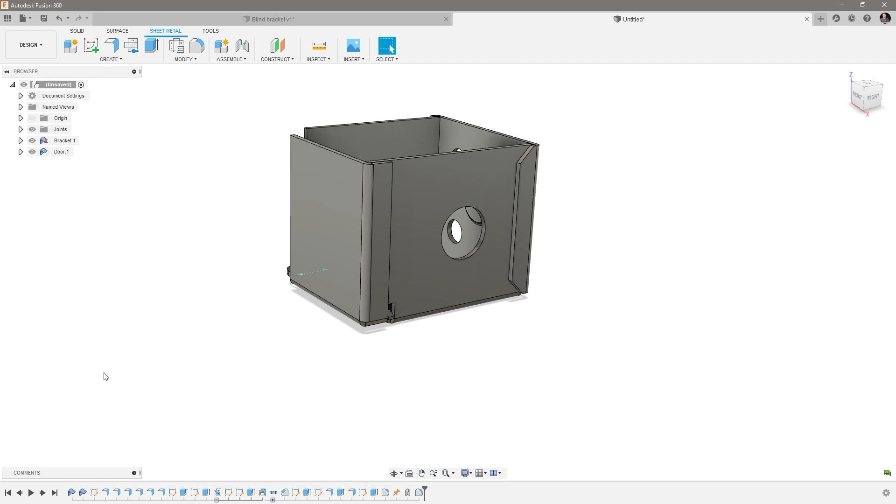You can always use these to revert back to position, and we can see how the bracket is all shown up this way. So when we have this one active, we see everything we did together. If we go down to the bracket, you see all the different steps we did for the bracket, and down to the door, we see the steps we did for the door.

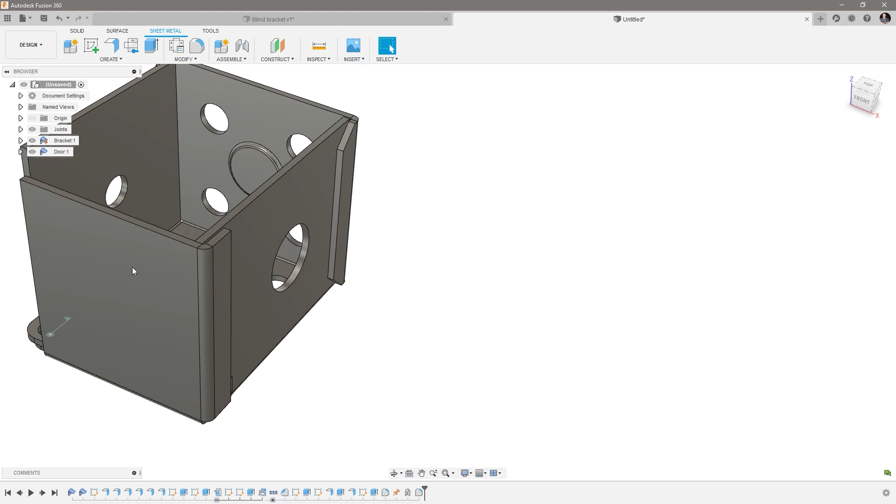So the things to show were that we can convert a STEP or a SolidWorks or an Inventor file into a sheet metal part, which is super awesome. But then also how we can select multiple edges, like we did in the beginning, and drag two sides up. We can have multiple sides, multiple flanges being created.